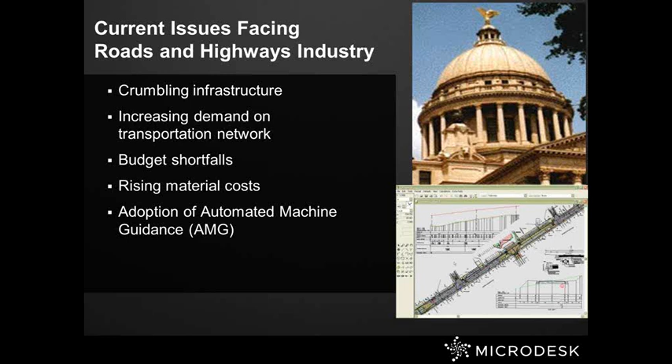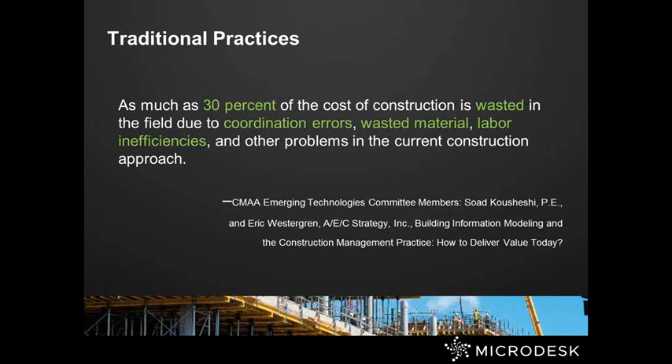According to the Construction Management Association of America, as much as 30% of money spent on construction is currently wasted in the field due to coordination errors, wasted materials, labor inefficiencies, and other problems. And this creates an opportunity for companies to gain an edge by reevaluating traditional methods in order to improve the overall efficiency of delivering projects.

So how do these current issues facing the road and highway industry affect your business and your business decisions? Why might these conditions facing the industry lead you to consider a change in your current workflow? Well, let's start looking at some of the critical challenges facing the transportation infrastructure business.

First off, much of the design can be lost in translation when you transfer data to other applications. Using a one-stop solution such as Civil 3D will help you consolidate your design applications and ease the process of maintaining internal standards. And this will decrease operation costs and exposure to liability.

And also, business is becoming increasingly competitive, so there's an increased pressure not only to strengthen relationships with existing customers, but also to acquire new ones. To accomplish this, you need to distinguish your services from the competition to deliver more value. And what better way than to leverage model-based design to obtain unequaled responsiveness to design changes and alternatives.

And finally, being able to deliver quality work on time requires good people in your organization. It's becoming increasingly challenging to attract and retain good quality employees. Using the industry-leading tools and practices provides a sense of accomplishment and professional development among employees and helps increase job satisfaction and subsequently employee retention.

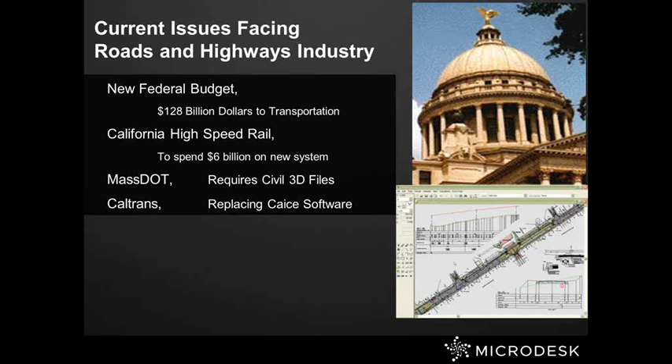So as you can see, economic pressures are forcing agencies and firms to seek ways to improve the competitive edge, decrease overall overhead, enable clearer communication, and maintain coherency with current technology. Autodesk solutions help address the workflow challenges that have kept many of us from achieving our goals and doing it better, faster, and more cost-effectively.

So we've talked about some of the problems and the opportunities for growth potential. In this ever-changing economy, you need something that can be a one-stop shop, do things faster, more affordably, and more dynamic, so that everything always is accurate and reduces the need for change. So that in a nutshell describes what we're going to be going into today. So what I'd like to do now is jump over to Civil 3D and demonstrate some of these tools.

Okay, so for those of you who haven't seen it, this is the current Civil 3D 2012. I just have a blank drawing open right now. And what I want to start by doing is demonstrating some of the survey functionality. And this is some of the stuff that Caltrans was real impressed with, which is why they're going to this and leaving some of the old CAiCE stuff behind.

So what I'd like to do is process some survey data. Now, the way Civil 3D works is they have an entire survey module that's been incorporated into the software for processing all of your data. You can even plug your survey equipment right into your computer and pull the raw data straight from there, process it, and then output any type of field book file, text file, ASCII file that you need to generate your base maps. So I'm going to start off by bringing in some survey data.

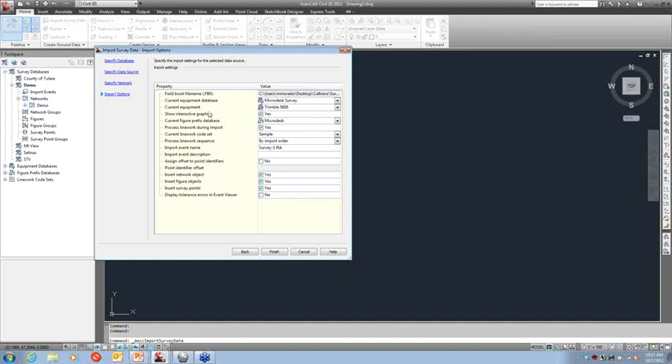When we get to our summary page, which just clarifies the file I'm bringing in, the databases that are being utilized, and some of my default settings, I'm going to go ahead and choose Finish. And what you see now on the screen is it's replicating what was done in the field. It's setting up at each observation point, shooting every side shot, and generating all of the points and line work based on the line work code sets that were used in the field. So we'll give this a second to finish processing. Looks like it's just about done.

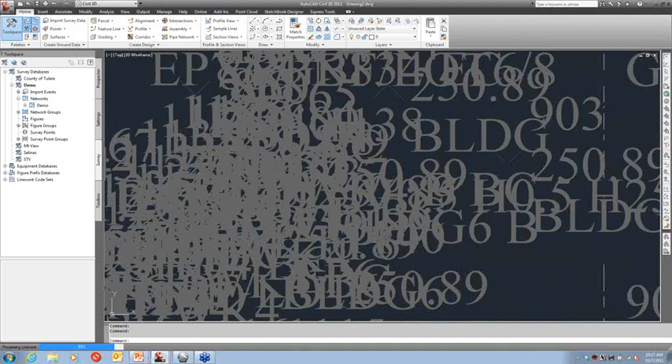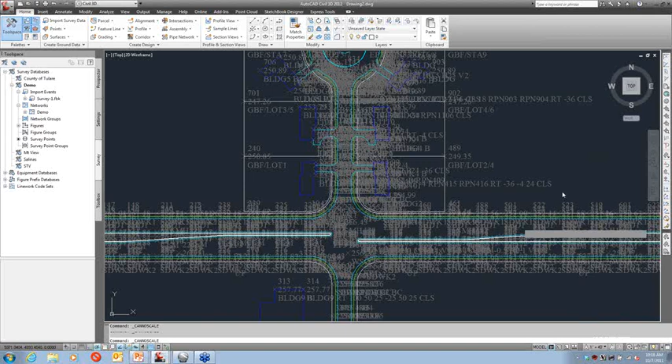And so now you can see what we have here is an intersection with a couple roads, a cul-de-sac, and some buildings and some parcels. It looks a little bit messy. A lot of people are probably pretty familiar with seeing this sort of thing when they process survey data. One of the great things about Civil 3D is scale is not relevant to us. We can change the scale at the drop of a dime. You can see right down here at the bottom of my screen that I'm currently looking at 100 scale. So if I set it to, say, a 40 scale, everything scales accordingly. It makes it a little bit more manageable.

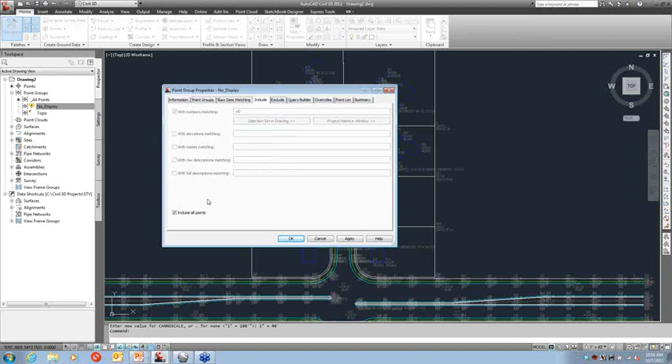Now the display of these points, they all run off point groups, and those are listed over in our Prospector tab. And if you look over in our point groups, you'll see that we've got a few. All Points is contained with every drawing, which houses all the points in the file. And then the No Display point group kind of takes the place of the old freezing your layers workflow. And these run off a hierarchy. So if I were to go to my properties and just take my No Display and move it to the top, you'll see that it turns off all the points. And then I can just go back, move it back, and then I can see all my points again.

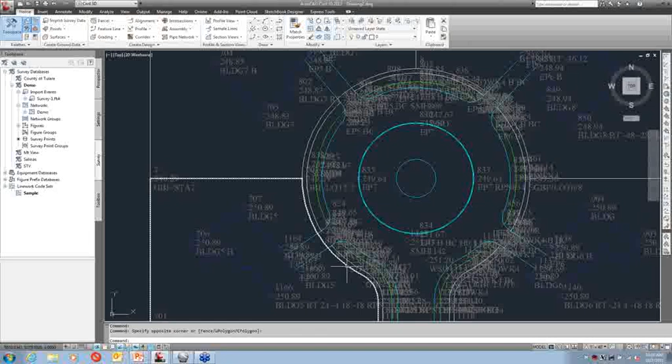You'll also notice all the line work that was brought in. These were facilitated through the line work code sets. And on our survey tab, you'll see that we've got options for line work code sets and processing that line work. And you can see everything's been applied to a certain layer, styles, and colors, and line types. You'll also notice that one of the buildings didn't come in quite right. It looks like it kind of went the wrong direction, probably a typo in the field. So let's show you how quickly and easily we can resolve this.

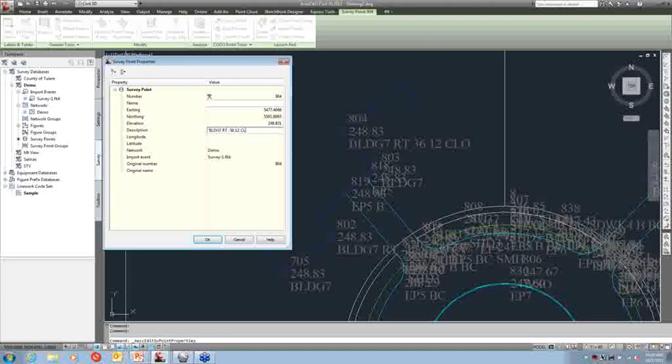So I'm just going to click on this point, and my contextual ribbon will activate, and you'll see that I've got an option for getting to the survey properties of that point. And this line looks like it was supposed to go to the left, which in Civil 3D is a negative value. So let's just put a negative value on that 36. And then the close code on here was actually supposed to be a CLS, not a CLO. Again, just a typo. So we'll just go ahead and accept that,

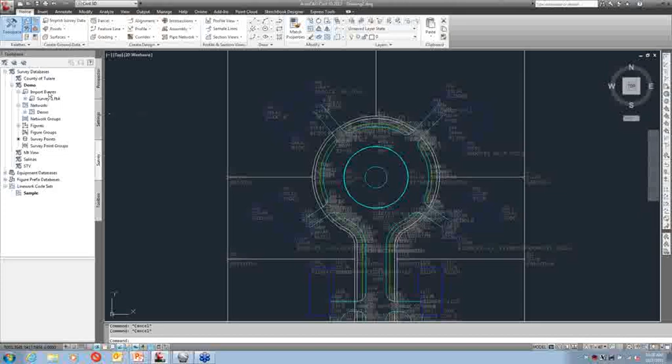and we'll press enter. It'll ask us if we'd like to update our line work. We'll say yeah. We'll let it reprocess everything. It'll scan the entire drawing and reprocess all the line work in the event that you've changed multiple entities. And then as soon as it gets done, you'll see that the building has been resolved, and now we have nice clean line work. Going back to our Prospector tab, we can now go to the properties and move No Display to the top, and we have our base map creation heavily expedited.

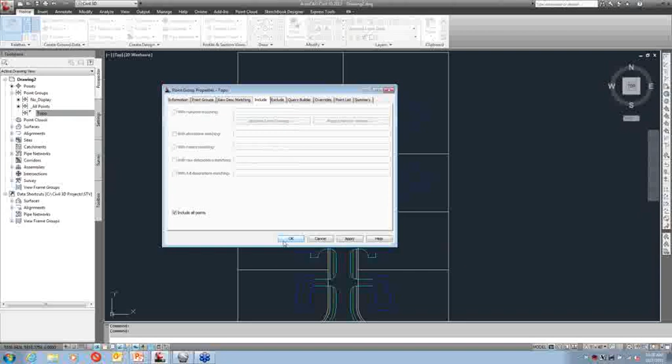One of the next things we can do is we can go over to our topo point group, and we can tell it, for expedition, I'll just say use all the points. And you can see how it will quickly generate the surface based on all those points.

And it's a little bit messy, but that's very simple to clean up as well. I can go over to the definition, and I can put a controlling factor on how long these triangles have the ability to grow to. So we'll say nothing over, say, 200 feet, and we'll let that rebuild. And you see it removes a lot of that extraneous line work.

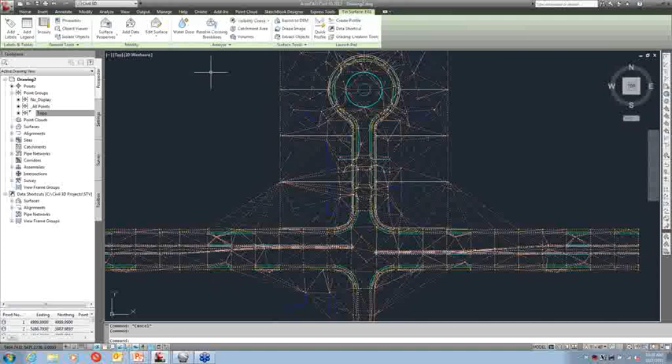And then editing and cleaning this up is just as simple as selecting it. Again, I just select on it. My contextual ribbon activates and gives me all the tools I need to work with the surface. And I can simply choose to edit and delete a little bit of line work. And everything gets cleaned up and resolved.

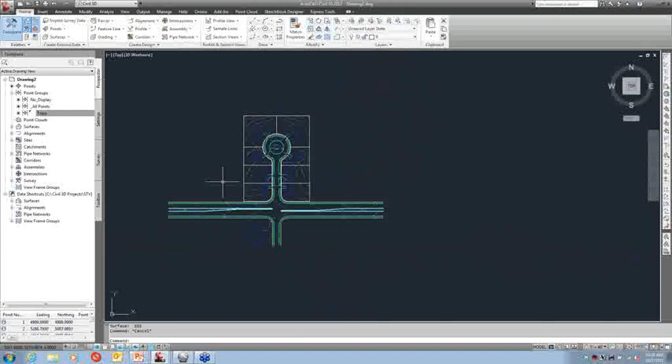I can then choose to change my surface style. And maybe I want to show it as 2-foot contours. I'll apply that. And you can see that it turns off the triangulation, gives you that surface. Contours are just a display style. If I wanted to, I could go to 1-foot contours, and I can get those as well. And then if I wanted to, I could even go to maybe surface banding to see the elevational differences. So very simple and easy to work with.

And you can see how fast and efficient it is to process that data using Civil 3D. The nice thing is that it is dynamic, and it is saved to a survey database, which is external from the software, so it is protected in the event that you accidentally change field data. So that's just kind of a quick introduction on how some of the survey functionality works.

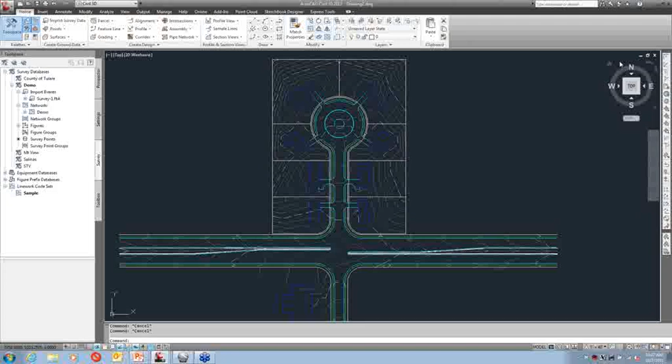What I'd like to do next is, sometimes we don't always have the survey data when we begin a project. Sometimes we're proposing on a project, or we're trying to obtain information about a project prior to sending the survey crews out there. And so sometimes we need to get some preliminary information up on the screen. And so what I'm going to do now is, let me just close this file out. And I'm not going to bother saving changes.

And so from a blank drawing, one of the great things about Civil 3D is it's written on top of Map 3D, which is a complete GIS solution. So if you have any kind of Esri data, ortho images, whatever you may have, those can all be connected to and used for your base map creation. And so as long as you go to your drawing and you establish a coordinate system, it makes it very easy to connect to that data and have things apply to the correct place.

So one of the nice things about the newer versions of Civil 3D is it's fully integrated into Google. Google Earth is available in here, and so you can bring in imagery, surfaces, both, or create AutoCAD meshes from it. So what I'm going to do now is I'm going to switch on over to my Google Earth, and I'm just going to pick a point that I've selected.

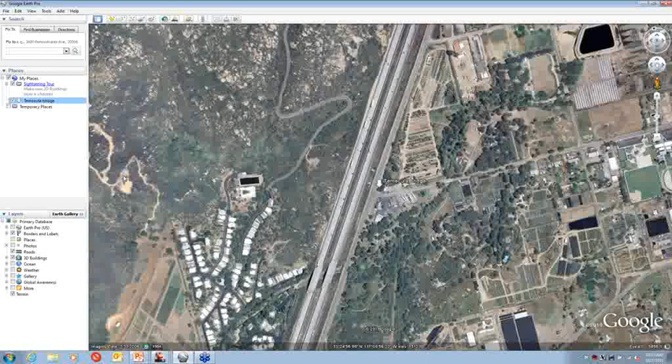And I just picked an arbitrary location, a freeway, and perhaps the client that you're working with has asked you to put a ramp in here, and we want to tie this road in. We want to put an on-ramp onto the highway. And so this can be done very easily through Civil 3D. Now the great thing is, as I said, these things are interchangeable.

So within your Civil 3D, if you just go in and tell it to import an image and a surface, for example, it will go through and it will capture wherever you're zoomed to on your Google Earth. And it will generate 5,000 grid points to generate a DTM for you and drape the image as well. So as you can imagine, the tighter you zoom in, the more accurate the surface is for you. But again, you need to remember that this is for planning and preliminary purposes.

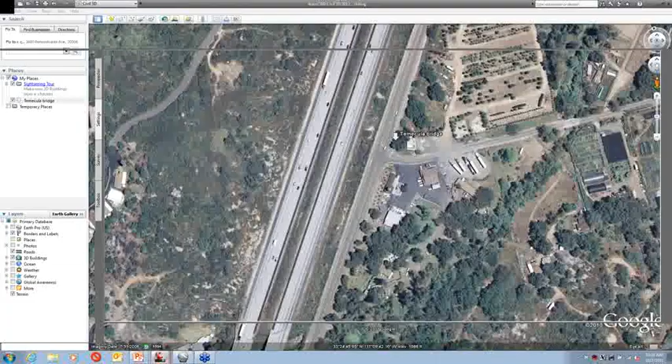So once you do choose that option and process it, you'll see that it quickly brings in a surface and a photo, and it's very good for planning and analysis purposes prior to actually getting out there and spending any money on the project. Because if you can go into a proposal with hard data and hard information and an analytical intent on the project, you're going to definitely have a clear advantage over your competitors who have just maybe walked in with a piece of paper with a number on it.

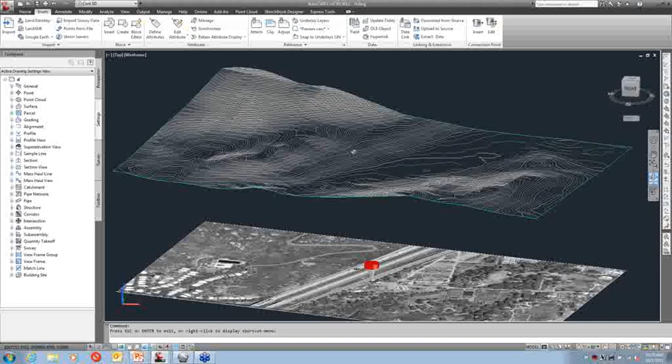So you can see we've already gotten surface data, we've already got a surface TIN, and we've got the photo as well. And it's also very simple and easy to turn this thing and drape the image right on top of the TIN, which is also good for marketing material.

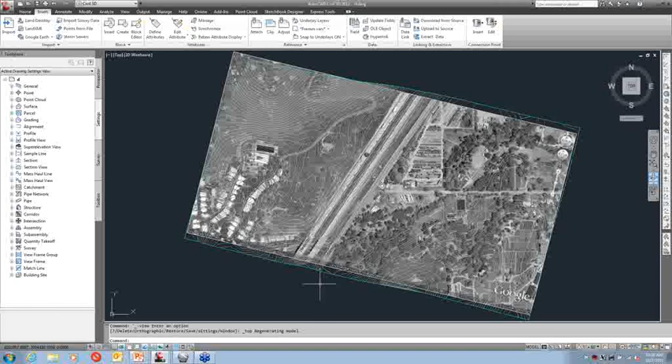So I'm going to take it back to my top view. So this would be step one, and you can see it comes in very quickly. No time and money is spent at this point in time, but it's the basis for beginning your design. One of the next things you would do is you'd come in and you'd start modeling corridors on each of these highways and this roadway.

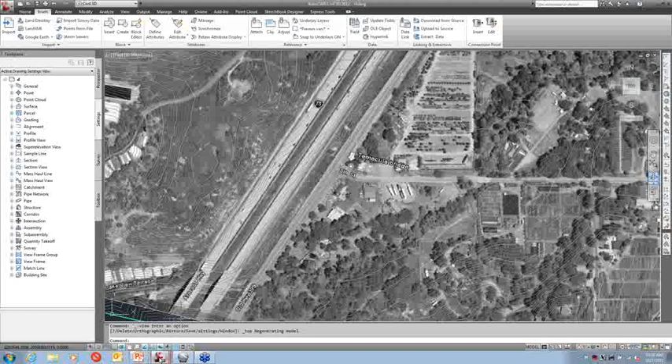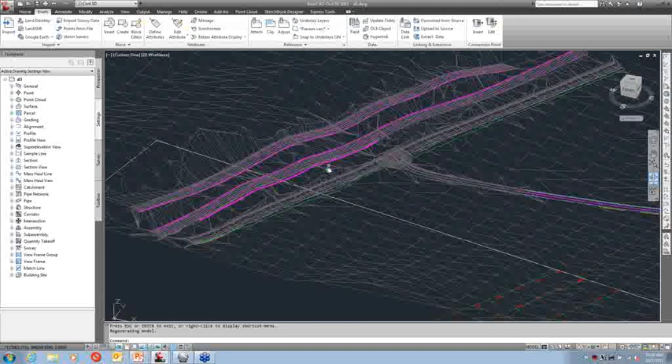So in an effort for time, I've gone through and modeled a few of these. So I'll flip over to another one. And you can see now that we've got some corridors modeled here. And if I go ahead and turn this, you'll see that, and this was very quick and easy to do. You can see that we have models of those freeways, those side roads, and they've been interlaced into that DTM that we were able to pull out of Google Earth.

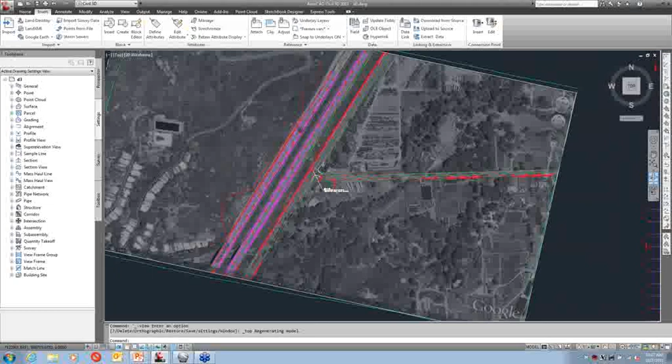So we've already got a conceptual model, and now we can start developing our proposed plan. So let me go back and reset to a top view. So let's start looking at how we can utilize some of these Civil 3D tools to come up with the best concept. And one of the great things is that we do have design criteria built into here, so anybody who's done a number of civil engineering plans knows that there's a lot of time spent on making sure your design complies with local and AASHTO standards.

And you know, if you don't check it through the standard books, I guarantee your plan checker will find it, and that ends up being a lot of redesigns and design changes, which is costly. So what I'm going to do is I'm going to start off by creating an alignment, and I'll just call it ramp. It'll be a centerline alignment, and I'll start at station 10.

And you'll notice I've got this tab over here that's available to me called Design Criteria. So I'm going to switch over to here. And from here, I can now set the speed limit for this road, and I can specify the criteria that I'm going to be using. So if I say yes, I'd like to use a criteria, you'll see that the AASHTO criteria is already preloaded with the software. This is nothing that I've done prior to this demonstration. It's available to all of you.

You do have the ability to create local criteria, and I'll show you how to do that in just a moment as well. So I'll just go ahead and say, because this is a ramp, maximum 12%. That works for me. I'll say OK. And then I get my alignment creation tools. And I'll just tell it I'd like to create some tangents with some curves. And I've got a little tick mark where I've decided I'd like to tie into this road.

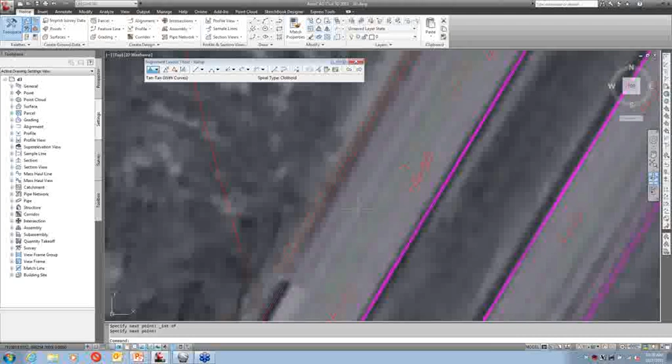So now I can just come off and say, maybe I want to go there, and I want to come around, and I want it to tie in, I don't know, somewhere about station 17. So quickly and easily, it's generated that alignment. You'll also notice, if I zoom in, it's got a mark on it. It says, hey, there's a problem here. And this is what's going to save you a lot of redesign time in the future.

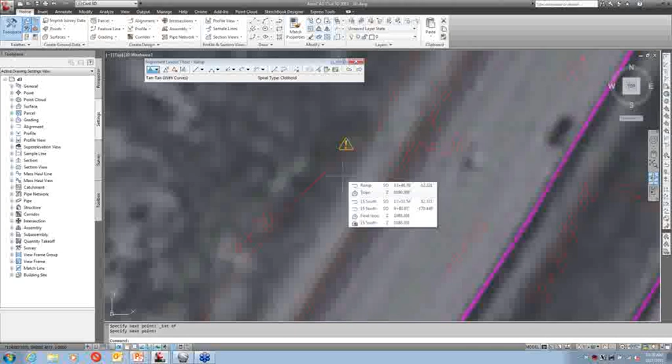So what we can do is we can look at the grid view for this alignment, and you'll see that there is a problem with the radius. And you'll also notice that it's even proposing a new radius. And so if I go to the sub-entity editor and select that, you'll see that it activates that curve, and it tells me all of the things that aren't compliant with the local agency standards. So what I can do is I can change my curve radius to something greater than 1,005. But being that my ramp is so short, that's probably not going to work.

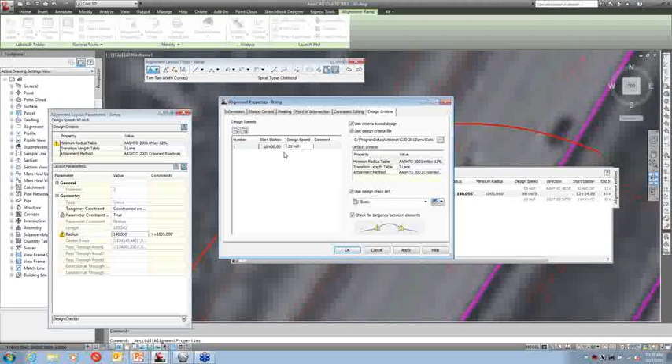So what I can also do is say, well, maybe I need to slow down this road. Maybe 60 miles an hour on a ramp is much too fast. So I can go in and say, maybe I want to go at 25 miles an hour, just a small on-ramp. I'll update that. And you'll notice how everything is updated based on the AASHTO standards.

So now it's saying all I need is something over 145. So if I go in and say, how about a 150-foot radius curve on there, it's now resolved that, and now my alignment complies with local standards. So very quickly and easily, you'll be able to identify things that aren't going to work with your design and then move forward.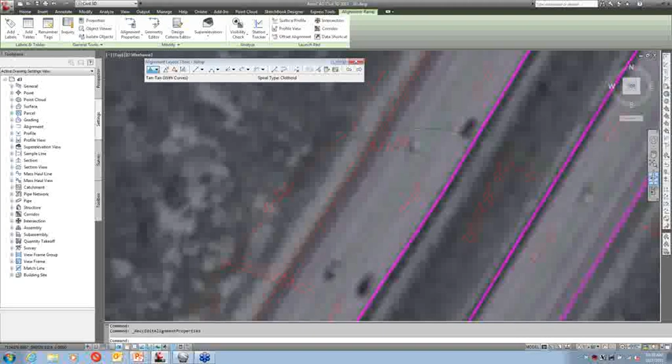Also, you'll notice when I do click on that alignment, I've got an option up here, and I can also access it from my settings tab for design criteria editor. Inside here, I can create all of the local standards. So if you are working in the city of Los Angeles or the city of Orlando or the city of Houston, you have the ability to go in and add local standards in the event that they're not putting their designs implemented per AASHTO standards.

It's very simple to go in and say, for my alignments, what are my minimum radius tables going to be? I can just go up and choose to create a new one and then populate my speeds and the minimum radii for those. I also have the options for my vertical curves, and with my vertical design, I can control stopping distance, passing sight distance, and headlight distance as well. You can save these local to your machine or on your network so that everybody can access them, and then use those every time you happen to design for that agency.

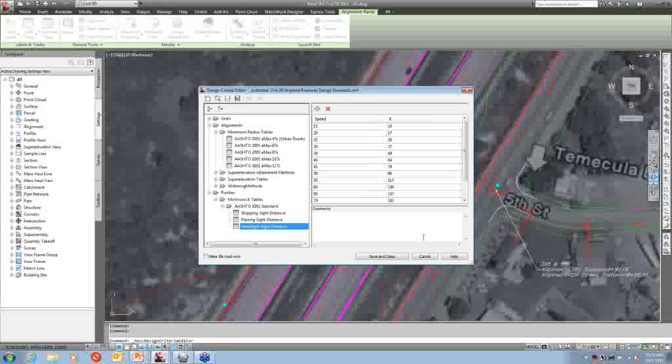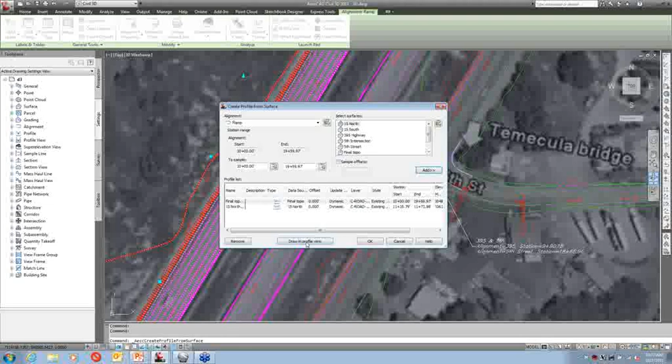So I'm just going to go ahead and come out of there. So you can see now my alignment does comply. So I know that this geometry, and I can choose to alter it if I like, but at least I know what's there now works, and I'm in good shape for that. So now that I've created that, it's very simple to select that and tell it to create a surface profile for me. And so I'll tell it to go in and sample the topography and also have it sample that highway that it's connecting to. And I'll tell it to draw me a profile. I'll just set it off over here.

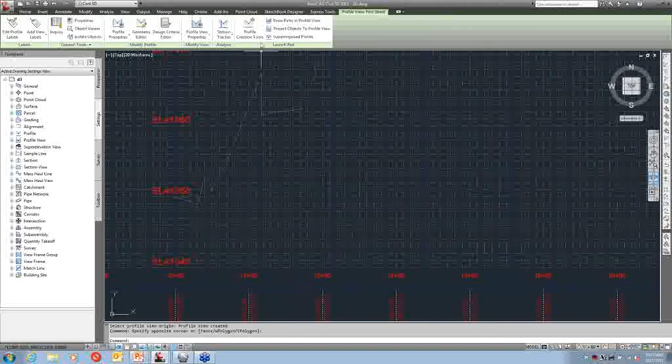And I actually drove this highway yesterday and noticed that I chose a very mountainous terrain. So we're actually going to put this road in, this little ramp in, as a tunnel way. So it's going to go through the hillside, come back out, and tie into the highway. So again, if I just quickly select this grid view, I can go and use my profile creation tools and call it proposed ramp. And again, you'll see that I have an option for controlling design criteria as well. So I can say, yes, use a design criteria. I'll just use the AASHTO.

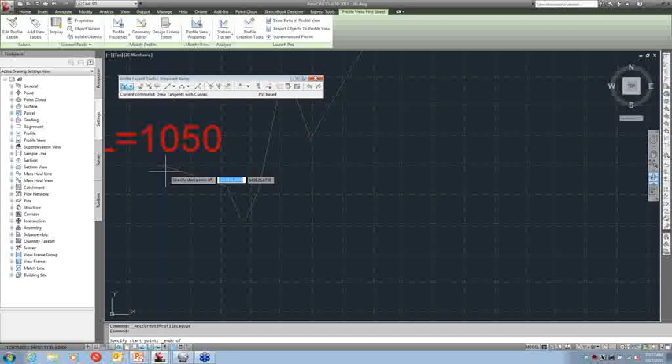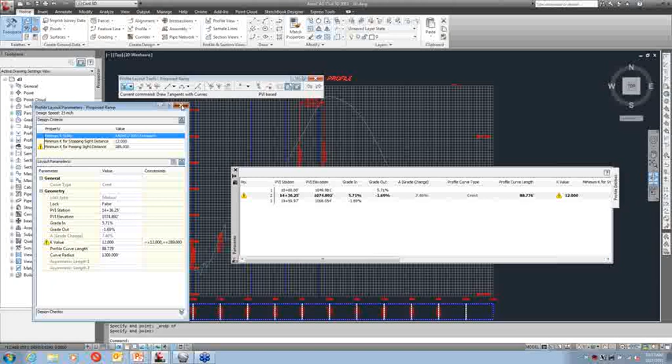And again, I can quickly go in. I can say draw with curves. I'll snap to the center line of that road. And now I can quickly just go in and come up with some kind of a concept. So very simple and easy. Obviously, my curve is going to be very small because I didn't set any curve settings. But again, if I look at my grid view, I can see what issues I may have with my design vertically. And you can see there's a K value issue. So again, I would just go through those same steps to increase those curves or maybe reduce the speed of those roads or maybe adjust the slope of the roads as well. So in an effort for time, we'll just leave it the way it is for right now.

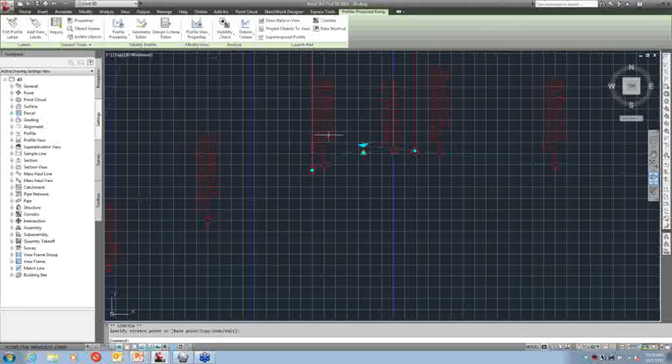And now you've got your horizontal layout, and you've come up with a vertical concept. And you can see the annotation is automatic and dynamic. So if I do happen to come in and make design changes, it's very fast and easy, and the annotation automatically updates itself and is always correct.

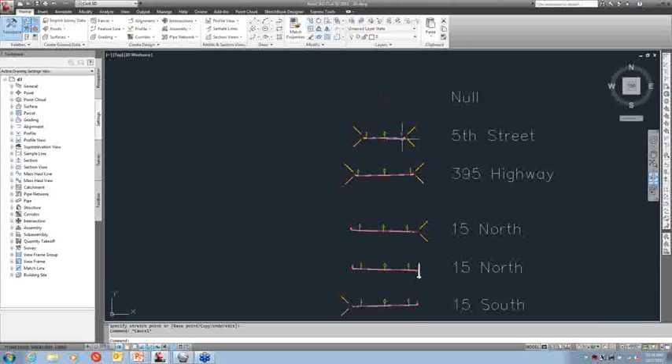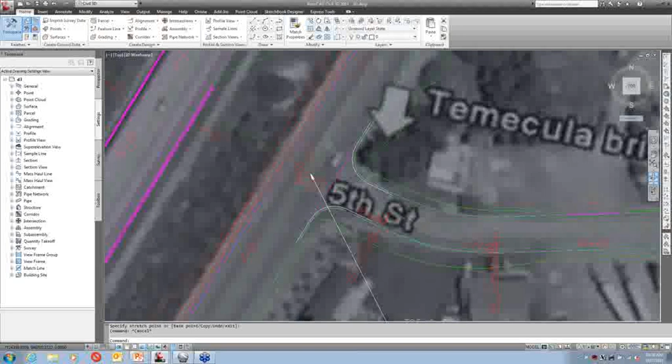So now that I've got that, one of the next things you want to do is you want to create a cross-section of what that ramp's going to look like. And so we've got our plan view, we've got our vertical design, and so you create these little cross-sections, and they're very fast and easy to make. They work like little Legos. You just create a little marker and snap on a lane and snap on a curb and maybe add some grading and such. I've done it again just to expedite some time. So what I'm going to do now is let's go ahead and build an intersection right here to tie this in. So I'm going to go up to my intersection tools, and I'm going to say create an intersection right over here.

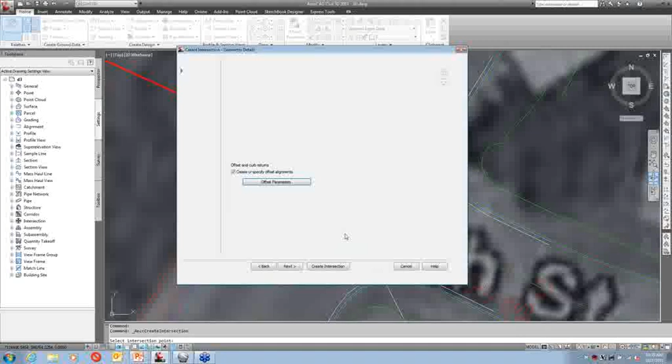And I'll go there. I'll check my offset parameters, adjust my lanes. I believe this one is 22 feet wide, and the ramp is only 10 feet wide, it's just a little single lane one way. So we'll just go 10 feet. We'll say OK. We'll go next.

And for this one, we're going to go ahead and choose the curb returns, that section that we'd like to use, the existing 395 that we're currently using. And for the secondary full, being that it's just a ramp, we're not having a bunch of grading and stuff, we will just use the ramp full. Very quick and easy to create. I'll just go ahead and say create an intersection now.

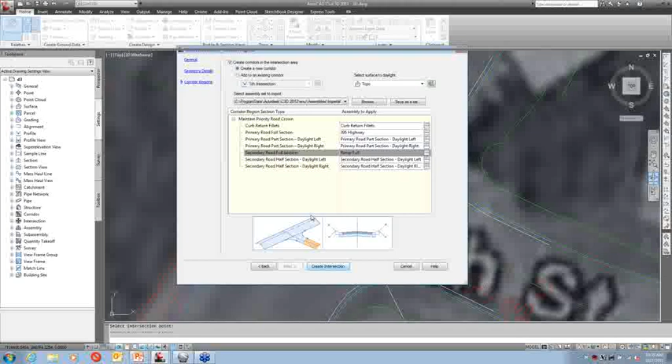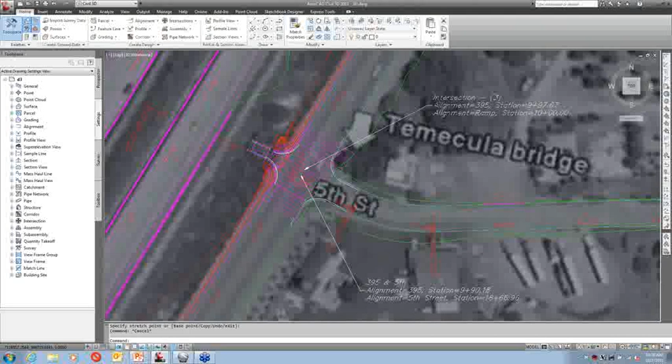And you can see how it quickly samples and models that, ties this road into the other roads. And I can grab this label here and kind of move it out of the way. Oh, I missed. Let's try it again. And just pull that out of the way. And so now we've got this new intersection that's tying in this ramp.

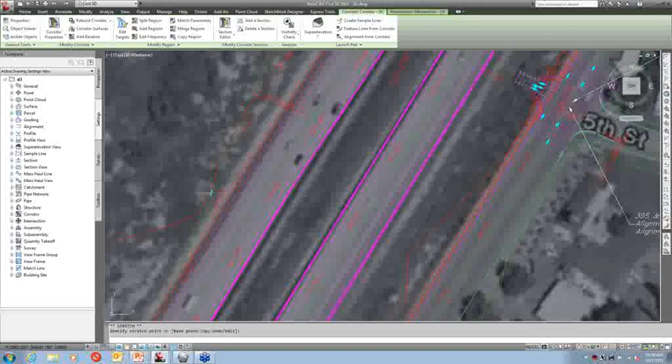And so it's very simple to grab this new intersection that's been generated. I can grab the grip and just kind of pull it around my ramp alignment to a potential point, and it quickly generates the ramp for me in a 3D model.

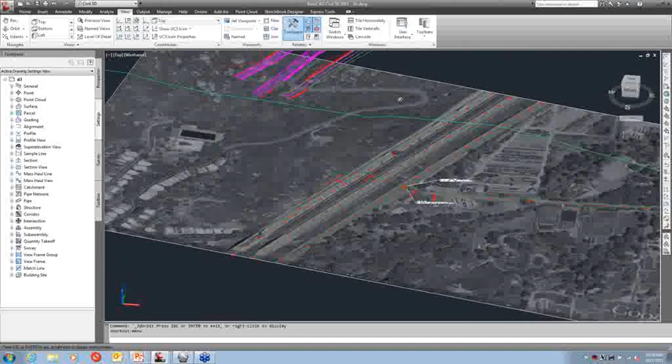So if I take this and turn it around and take a look at it, you'll see that it looked at the vertical design on the profile that I just kind of quickly slapped in and created a 3D model of that ramp. So very fast and easy.

Oh, it's getting away from me. There it is. So you can see how that's cutting in, going under the road, and I've got my little model there now. Pretty neat, huh? Fast and easy. We'll go back and reset my view.

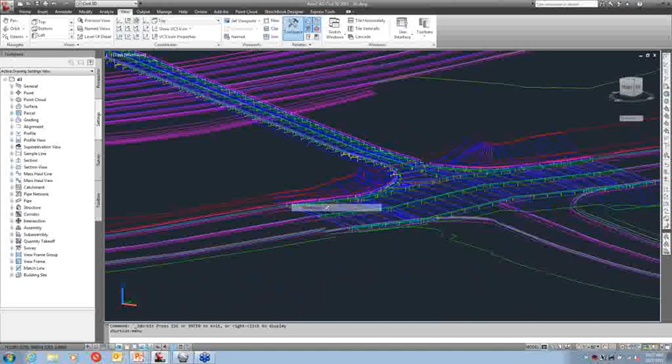So you would go through that same effort now to create another intersection where the ramp ties into the highway. And it's the same workflow. All you need is a cross-section of the highway, a cross-section of the ramp, and again, it would do that as well. So again, in an effort to expedite some time, I went through and modeled that up for you real quick. And now you can see what that would look like.

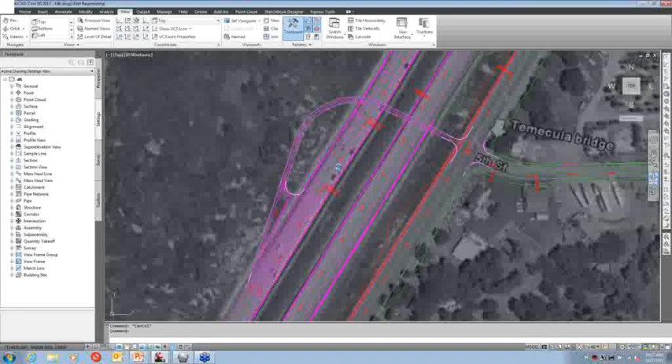So now what we can do is we can turn this one around and show you the finished concept, so we can see if we like it or if there's problems with it, or whatever the changes may be. There we are. You can see I've got a retaining wall along the side over there. And I've got my ramp in there.

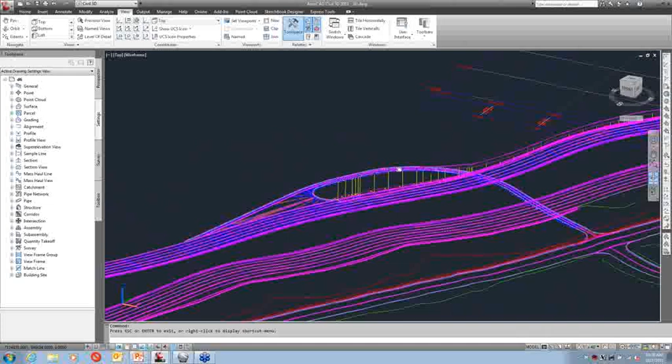Very quick and easy to make these models up. And now you can conceptualize them. You can do earthwork calculations. You can calculate your materials with them, or whatever have you. So now that we've come up with our concept, what we can do is let's generate some cross sections for that ramp, so we can take a look at what it's looking like in a section view.

So we'll go ahead and just kind of go through the wizard real quick. We'll accept a lot of the default values. Everything looks pretty good. We'll just pick an arbitrary point out of the way. Give it a second to let those generate. And you can see now that those cross-sections have been generated.

So one of the next things I want to do is I'm going to select this alignment. And you'll notice I have an option here for superelevation, how to calculate that superelevation. So I'm going to go ahead and say calculate superelevation for this rampway. And it's going to say, would you like to calculate now? Yes. And I'm going to tell it what calculation I'm going to do. It's going to be an undivided planar road. And I'll just kind of run through the wizard.

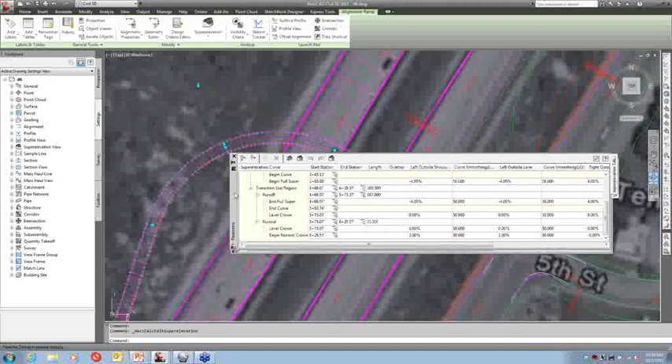And since it's only 10 foot wide, I'll do 5 foot lanes, 2% typical crossfall, no shoulder. And I'm going to use the AASHTO 4%, which works for me. I'll say OK. And then it's going to calculate where I'm going to need superelevation as I go around each of these curves and calculate the best, smoothest crossfall slope for the superelevation for that road.

So you can see now how fast and easy it generated those. And for anybody who's ever calculated these before, you know what a chore and an effort this happens to be. So you can see it's kind of varying from 2% to 4%. Pretty smooth, looks pretty good. So I'll go ahead and accept those values.

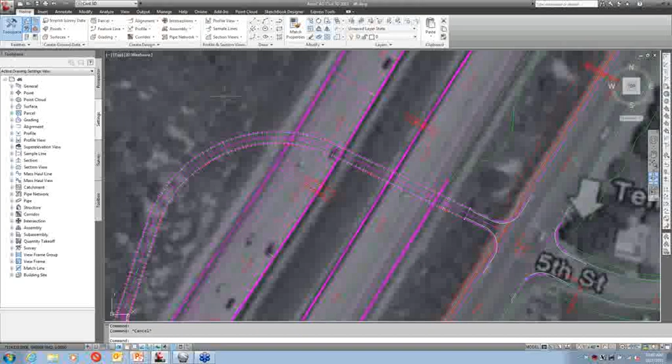And now what I can do is I can go back to my superelevation, and I can tell it to generate my superelevation view for me. It's going to be for the ramp. I'll say OK. And again, I'll just pick an arbitrary point out of the way. And again, I know from experience what a chore these superelevation diagrams can be to generate.

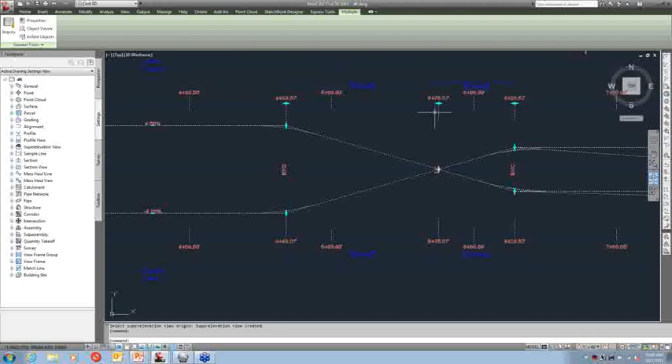Nice thing about these is if you click on them, you get these grips. And from here, if you're not happy with the results, you can change it on the tabular view, or you can simply slide these stations to whatever increments you like, or adjust these elevations so that you get the transitions you're happy with. And it will automatically update your model because it is a model-based design. So now, if we come over to our cross-sections, you'll see that the superelevation has now been calculated and added into that roadway.

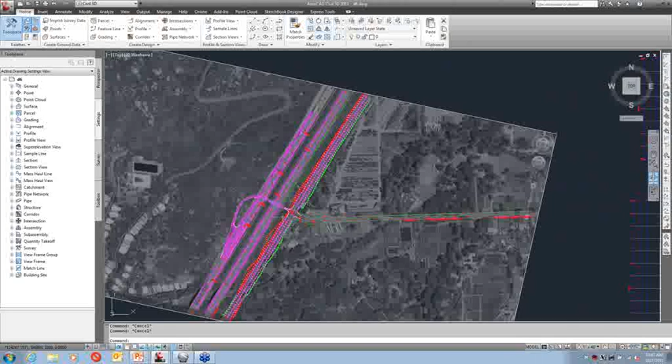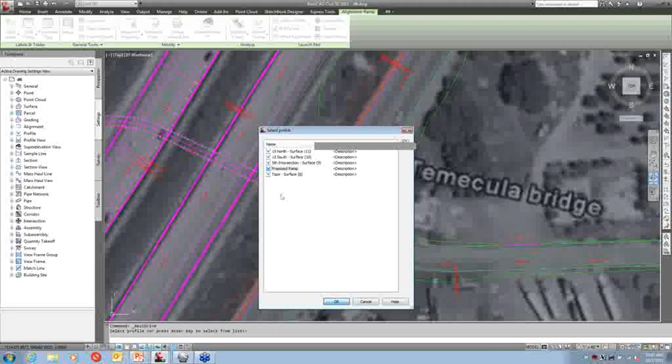And then finally, and I know we're running out of time a little bit here, what we can do is we can visualize our design. Now that we've selected this, we can say, I want to see what this road is going to look like. So I'm going to choose to drive on it based on the proposed design that I came up with. I'm just going to use a quick wireframe view just so we can kind of see what the concept's going to look like. So it's going to go ahead and process and generate a 3D model of us beginning at the intersection of the road.

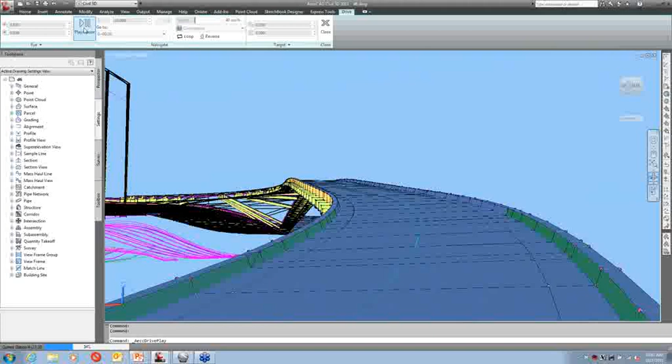And so you can see that the highway's crossing, and since it's a 10-foot wide road, I'll just say 5 foot on each side. And then I'll tell it I'd like to drive down this road. And now I can see where I'm going to go under the highway, how my ramp is going to look and feel as I'm driving on it, and then how it's going to tie into the main freeway and merge on. So I get a good visual analysis of my site.

So I can see graded side areas, potential obstacles, and things I may want to change that normally would be found in the field during construction time, which would cause redesigns. So very simple and easy.

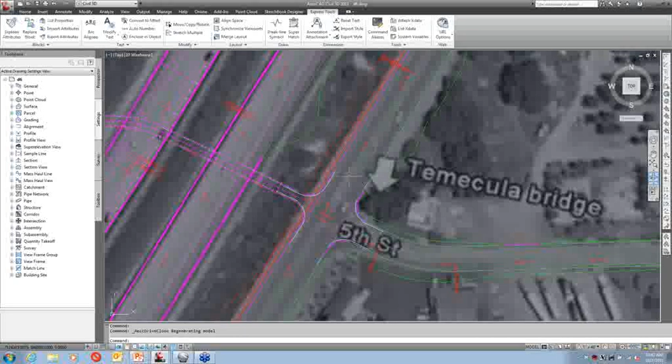I hope this gave you some insight on some potential things that can be done with Civil 3D, things that are very powerful for those of you who are currently using it, maybe things you haven't thought of to use. But as you can see, these corridors are very flexible, very dynamic, and they can control your standards, they can calculate your super elevations, and then they can merge onto existing data as well.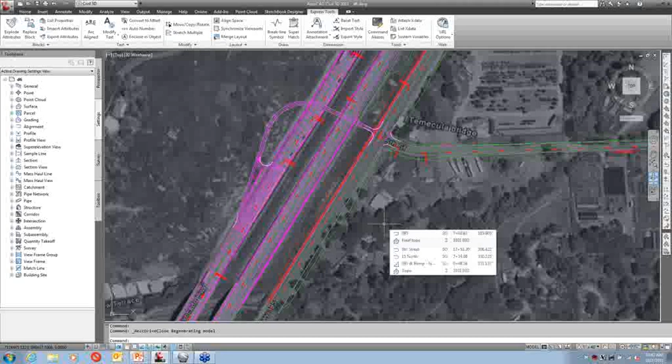That's not it. There we go.

So let's quickly talk about a few of the other tools in the Autodesk arsenal that can help with your workflow to make life easier. As I said before, Civil 3D is written on Map 3D, which is a complete GIS solution. It is underlaid with your Civil. It's also available as a standalone, and it is available in your Infrastructure Design Suite.

And for those of you who aren't familiar with those design suites, it's a new thing that's come out for 2012, kind of bundling several applications into one single license, one single price for easy convenience and access to multiple technologies to complete your workflow in a model-based environment.

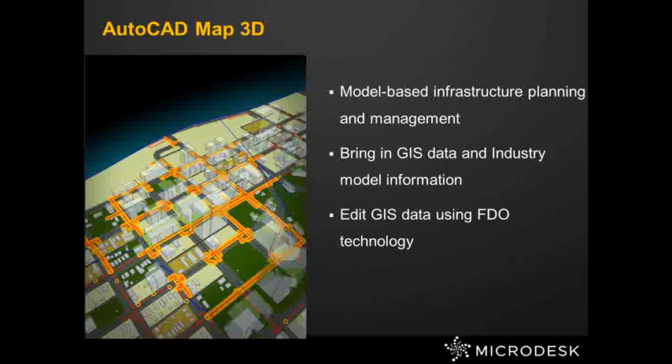Also, in the Premium and Ultimate versions, we have 3ds Max Design. Again, for those civils out there, you do not need to be a 3ds Max aficionado to run this. They've built a new tool called Civil View, and Civil View accepts your Civil 3D model, imports it in, and then has a lot of automated tools and wizards that will help you quickly generate pavement striping, opposing traffic,

street furniture, and what have you, so that you can quickly generate very high quality marketing material or just printouts that you can take to your client and say, this is what I'm proposing. And you can even generate animations similar to the drive one we just saw. That would be fully rendered with grass and pavement, concrete, and what have you, so that they can see what the final design is going to be like in the future.

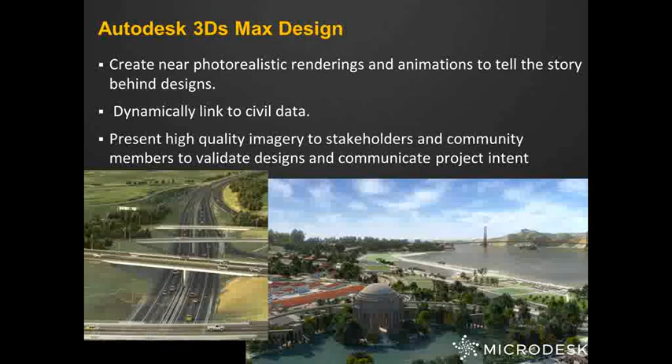And then also one of the things I'd like to mention is the newest addition to the Autodesk arsenal. This is called the new Infrastructure Modeler. This is a great new tool, and it's a way to quickly conceptualize how to model different scenarios, different options.

You can take your existing data, your existing map data, your existing civil data, bring it in and build a model, and then you can quickly sketch in roads, water, lakes, buildings, and with the drag and drop technology, you can apply different facades to different options, and they're very simple and easy to work with and manage.

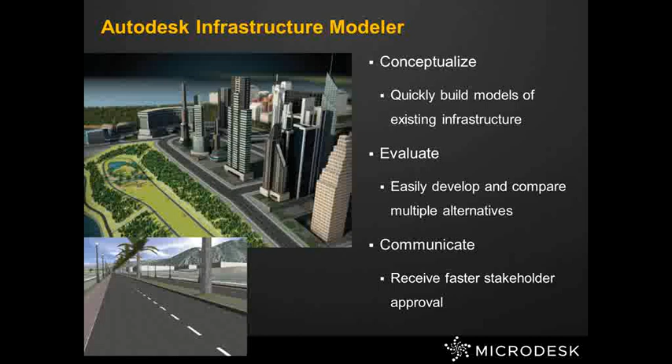So what I'm going to do now is I'm going to show you a quick little overview of what Infrastructure Modeler looks like and what it does. So here you can see the Infrastructure Modeler and all the different ways that you can bring in data. You got models and map data and things like that.

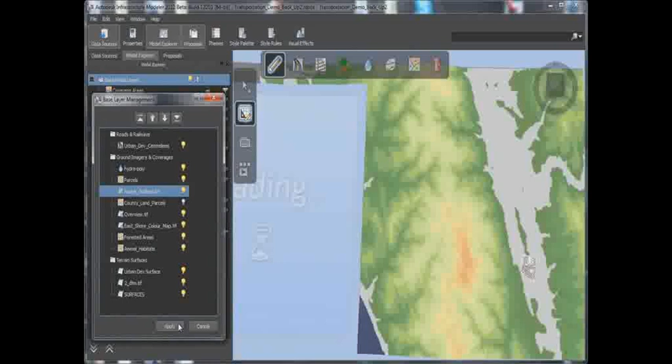And then we've got our base layer management tool, which kind of works like your layers, like you're working with now. So you can create these different concepts. Maybe you're going to create a roadway. It's very simple to toggle on. You can create one or two or three different options for roads. And then it's real simple to create themes for all the data you bring in.

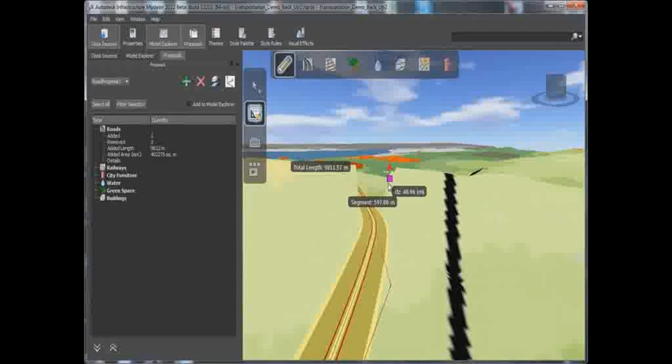Say you're bringing in analytical land data from Map3D. You can generate color schemes and things. And then you can just click and drop anywhere, wherever you'd like that road to be. And then once you double-click at the end, it'll tie it into existing infrastructure. And then you'll notice when you select it that it's now tied it in. If there's hillsides that you've gone through, it'll put grading in there.

And then you can use the vertices to raise and lower the roads and adjust it however you like, and then run visualizations to see what these concepts are going to look like. This is great for brainstorming and conceptualizing what your proposed design is going to be. And as you can see, with a couple clicks, it's very easy to push and pull these things. We can also turn that option off and come up with a second option.

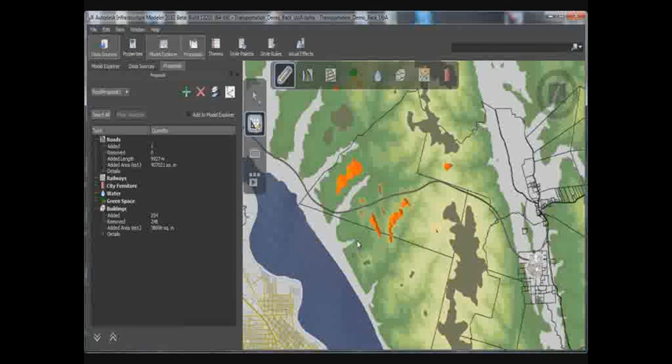Now, if you don't click and put vertices on the top of hillsides or in water, it will automatically put tunnels in and put bridges in because it knows that it's going from one end to the other. So it's very fast and easy to generate these types of models and options.

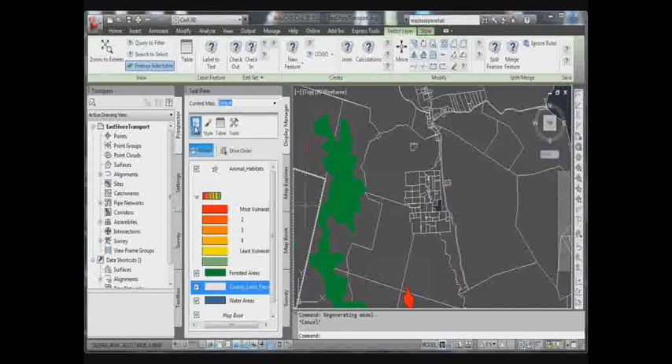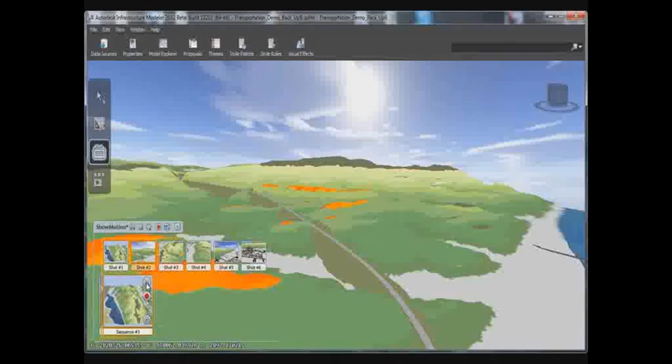And then because it's using the FDO technology, once you come up with these concepts, you can quickly bring them back into your Map3D or your Civil 3D and start using these as your base map content for generating your design concepts. So it's very comfortable in the environment we're used to seeing. So great new tool. I definitely advise everybody to look into this.

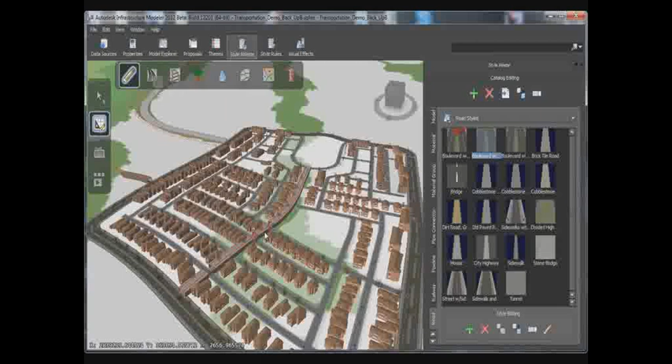And you'll see now that we can play with the drag and drop options to quickly come up with different concepts for different roads. We can go from single lane roads to double lane roads, all through drag and drop functionality. Same thing with buildings and water features. And anytime you click on them, it'll automatically tie into whatever existing structures may be there. And so you can see now we can quickly grab a different road section and apply that, and just play with different concepts. So it makes it really easy to work with these types of things.

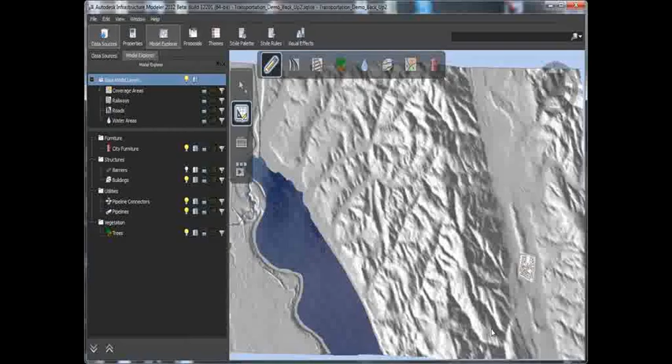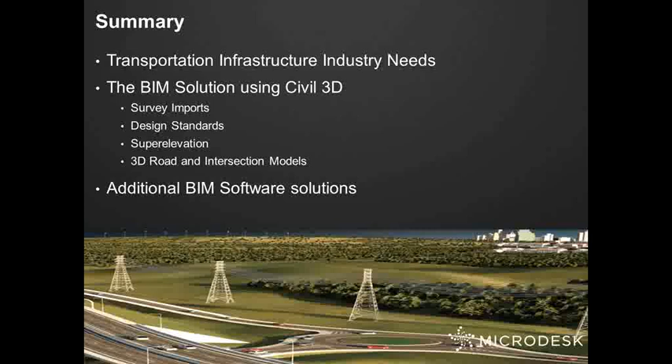So in summary, we've seen some of the trends that are going on in the industry right now. We looked at Civil 3D. We demonstrated some of the survey functionality and some of the base map creation tools. We talked about some of the design standards that are available to you for controlling your design criteria. And we looked at some of the super elevation tools and then some of the corridor tools for generating 3D roadways and intersections and highway interchanges, as well as we concluded with a little bit of the what's new, with some of the other tools that are available to you.